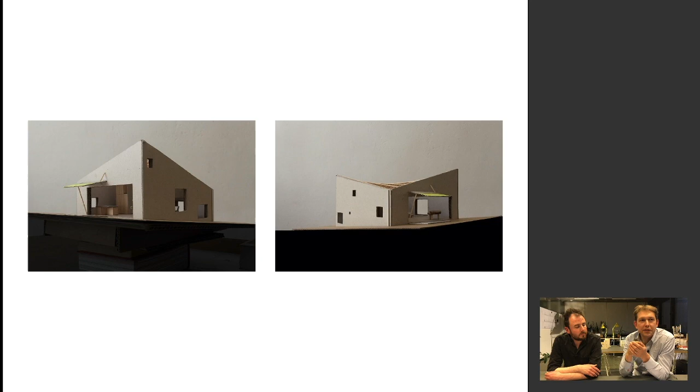With this roof, it was kind of an important moment in the design process when we transformed the flat roof into a hyperbolic paraboloid, which gives like 2 high points and 2 low points in the house. We placed the house as deep as possible on the terrain, as deep as legally possible let's say.

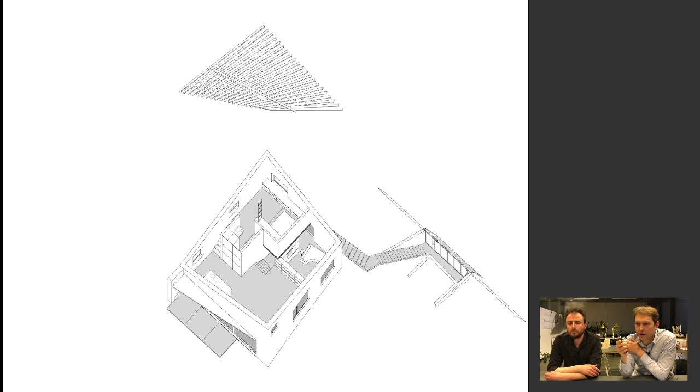So that it would be surrounded by the garden, and so that it touches the high level of the hill for the living spaces. And so you have these 2 high points: the high point with a double-high living room, and on the other side where we worked the house into the hill to have a duplex. And so the house is organized as kind of a spiral going through the living spaces, ending on the roof, like you see this staircase in the bathroom going through the roof skylight where you have then a terrace.

The last project was in a way also a way to find common ground between what was legally possible and what we wanted to do. So we had to do a pitched roof, which we then somehow transformed — this usually makes very introverted volumes, but we turned it inside out, and that was somehow accepted by the commune there.

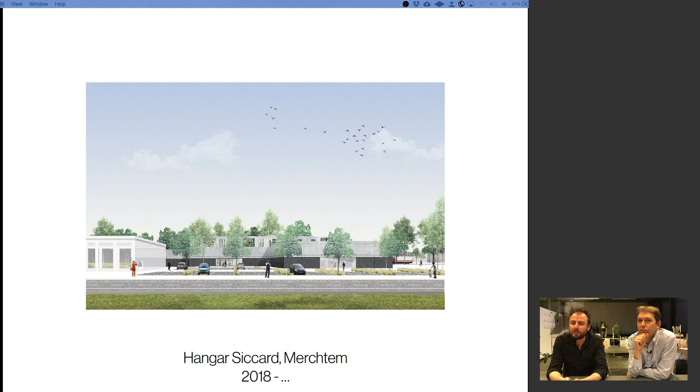This project, Hangar Siccard, is another one which is a bit atypical for our portfolio, because it's a new project and not at all in the old fabric of the city. In fact, it's at the Flemish Chaussee, the Steenweg, near Merchtem, and it somehow occupies the last lot there in the center, completely surrounded by industrial boxes and some leftover villas. So a very awkward but somehow typical context.

Here we're looking at the site and we see this kind of giant pacifier in the baby clothes store and a villa across from it, and there are other showrooms. This is in a way still agricultural land. And the client wanted to build, in fact, an industrial hangar, Hangar Siccard.

But he was somehow intrigued by the other possibilities this terrain offered. And it was bizarre, but there's a line running diagonally, parallel with the road, through the terrain, which divides it from an industrial zone in the back, which has other rules than the housing zone with commercial functions in the front.

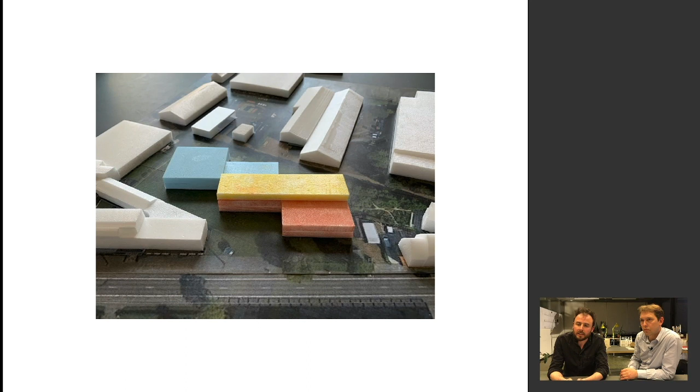Without wanting to maximize the economic gain on the project, we tried to make something that balances all these elements into one composition. We came up with this, which is a series of three more or less identical boxes and a strip of housing on top. The blue ones are industry, the red ones commercial, and the yellow ones housing. By this geometry, there's somehow a kind of peacefulness introduced in this chaotic context, we hope.

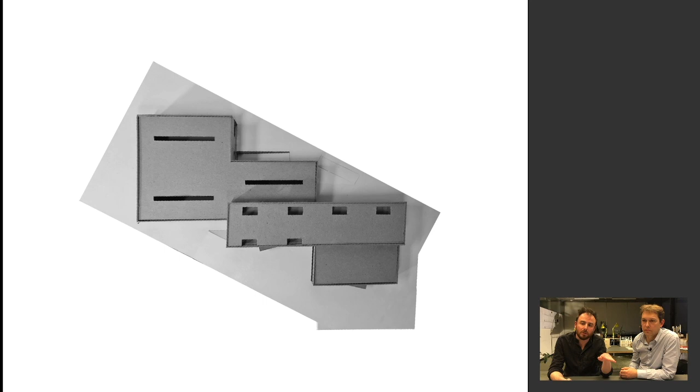It also creates pockets for each program. At the front, it's parking spaces. At the back, it's more loading bays for the industrial halls. And the pocket at the left is, in a way, a private entrance for the housing.

This evolved to this plan. You see that the boxes, we didn't manage to keep them really identical, but maybe that's not such an issue. They're really just empty spaces built with a very economical system.

It's just steel construction with concrete paneling above it. This system is continued into the layer of houses, where all these rooms are built under a big span of 12 meters. So in a way, all these walls can move around, and you make this kind of multifunctional lofts which are connected with the gallery. By their position, 7 meters above the ground, they look over this context of the chaussee and to the fields just beyond that.

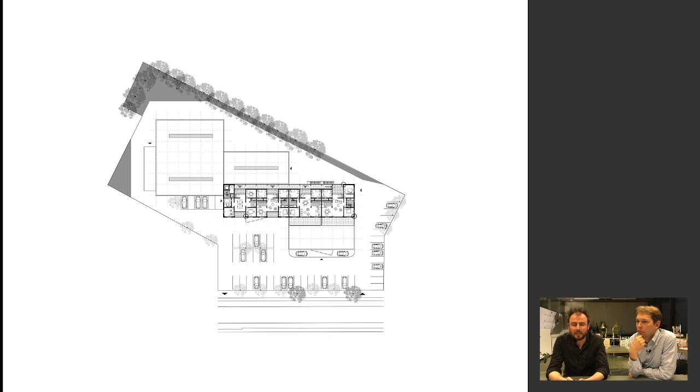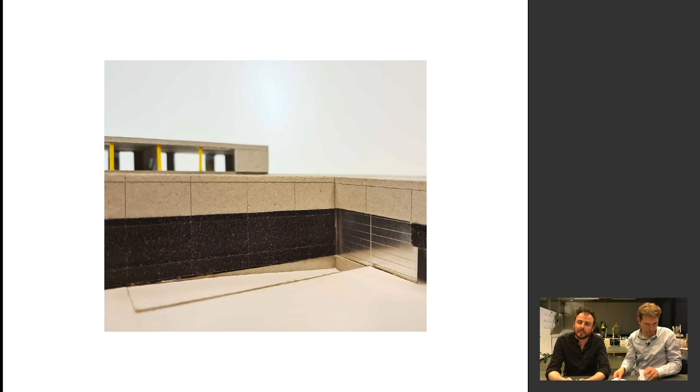Not far from there, we were asked to make a renovation of this historical pastorie, a rectory, just next to the church in a small village. This pastorie had been abandoned for a few years, and is surrounded by this enormous lush garden, which we were told it was completely unimaginable to do interventions there.

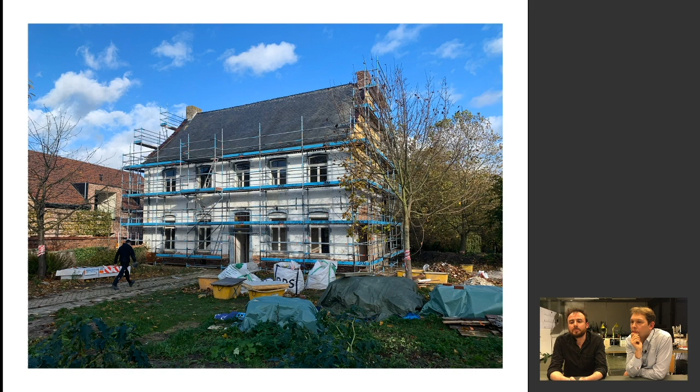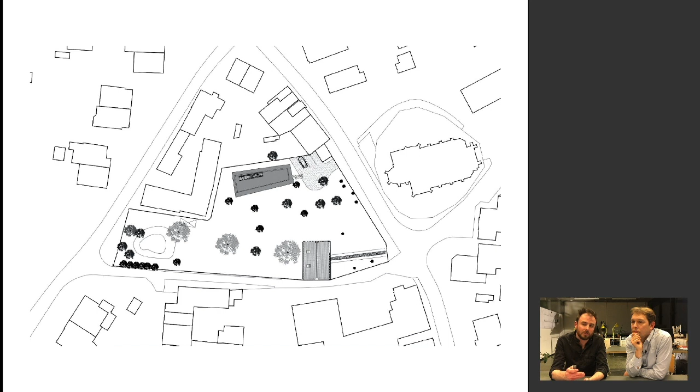We made an extension, which will be the offices of the family that lives there, and it's positioned as a kind of side pavilion with a separate entrance, as much as possible taking distance from the house.

The idea was to keep it very modest. At the same time, we had to realize a certain size for it to fill its function, and we came up with this idea that maybe the rooms could start small at the front and enlarge towards the back, and by taking a horizontal roof line, they would not only increase in size but also increase in height, so they become more and more spacious towards the end.

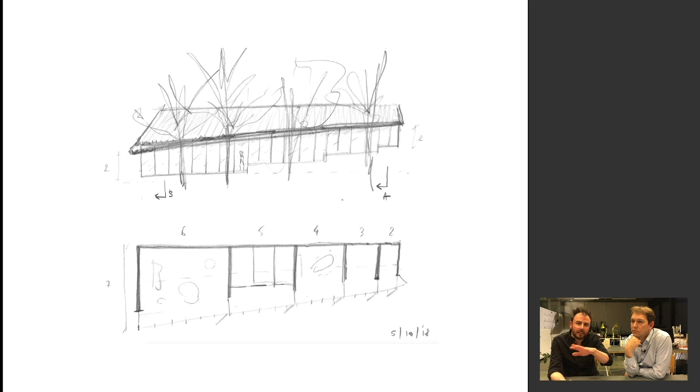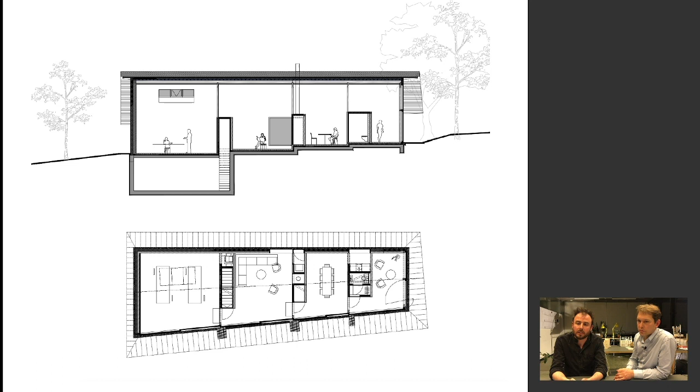This is an early sketch. You see this idea of a kind of logarithmic change of the rooms, and this evolved in the end to a bit of a simpler plan, where these rooms are separated not by walls but like boxes, which contain all the necessary functions like kitchen, a toilet, fireplace, stair to the basement, and start at the front as a kind of small entrance zone, and it evolves to the end to a quite large and spacious office.

This is the pavilion with the rectory next to it. And I forgot to mention, the clients had one requisite, and that was that the extension was to be made with a straw roof, a thatch roof, which we thought was a funny thing to ask, and at the same time kind of interesting. So we really made that into the face of the project.

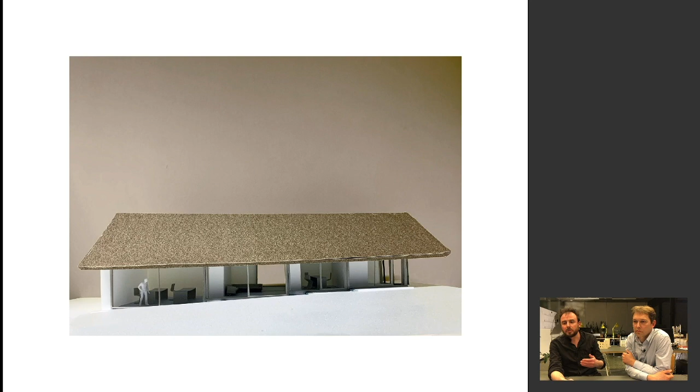So what you see from the garden, and this is a collage from it, is mostly this roof, and then under it, quite subtly, the facade of the office.

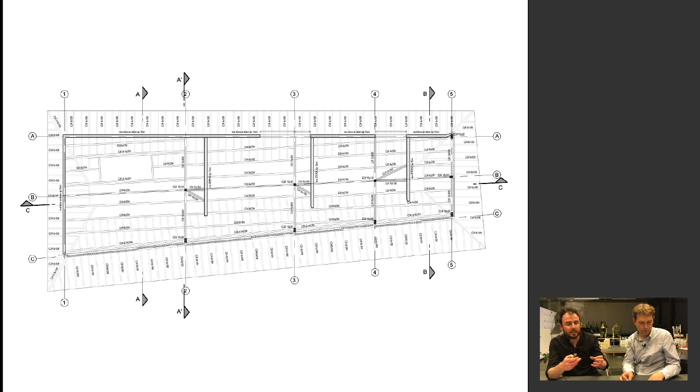The roof itself is a construction out of oak. At the same time, it doesn't have the typical huge oak dimensions. So we worked quite hard with our engineer, Bollinger-Grohmann, to create something that really reduced the dimensions of it to the limit, with columns rising 6 meters high in the center, but only 10 by 10 in dimension.

And then afterwards, the contractor, a specialized wood contractor from Liège, I think called Cine, took over and made very detailed drawings of every element of the pavilion.

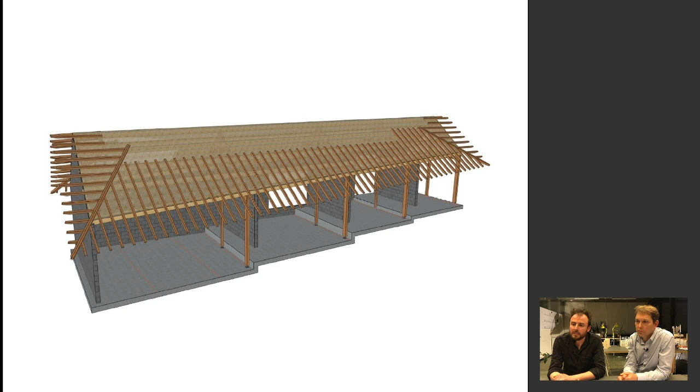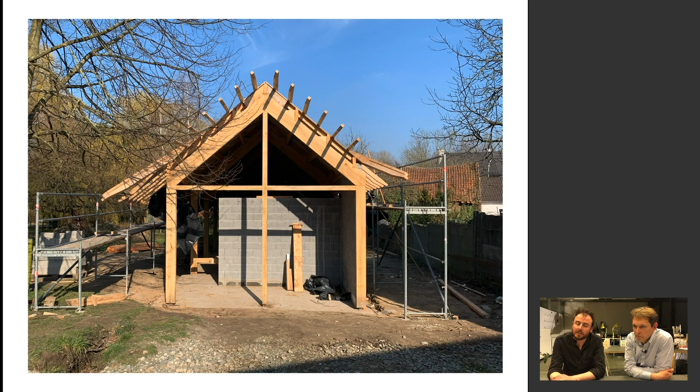At the moment, it's under construction. This was a few weeks ago, where we see these porticos with these slender columns supporting the center of the roof. And this was actually today, visiting the site where they're finishing the cantilever of the roof, and here you get already an idea of the space that it becomes.

I jumped to another project, an important project for us, the Gare Maritime, which we see as a new common space in Brussels, a new kind of public space, let's say.

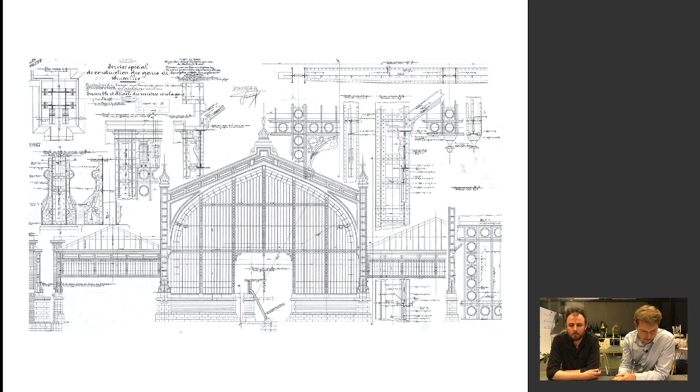Funny enough, we also found hundreds of plans documenting everything that went wrong with the building. There were a hundred building campaigns by the NMBS, transforming the building into a kind of technical shed. We found all these plans where they talk about removing the ornaments, or replacing the glass with undulated plates, or moving gates, closing off halls, etc.

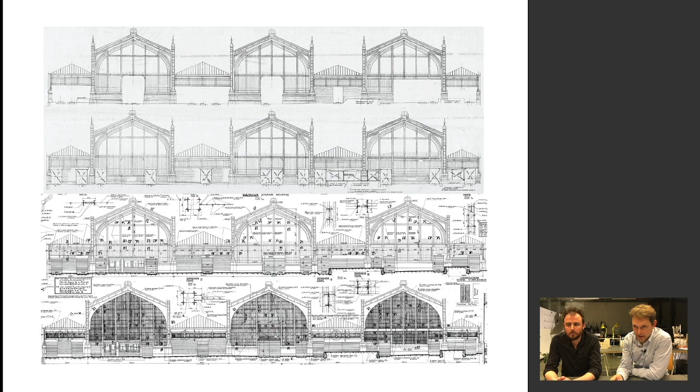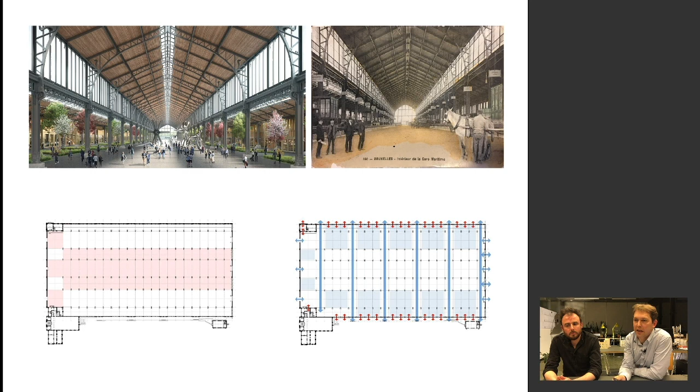Inside the hall, we decided, together with Neutelings Riedijk, to make the inside architecture, and we worked together with Bureau Bouwtechniek for the skin of the Gare Maritime. Inside, we decided to keep the central halls free of buildings, so that they would become the identity of the Gare Maritime - you see the original dimensions of the building, you have a lot of original elements.

And then we created a kind of grid organizing the Gare Maritime as a kind of city, a covered city, with streets and squares and access.

And we tried to open up the Gare Maritime, which used to be kind of a treasury box, very secured, completely closed, into an open part of the city in which the urban tissue around would continue.

Here in this slide you see these concepts translated into technical plans. We had to go look for the original stones - we found some on different places on site, or recuperated stones in the demolition - to make the openings, etc. This way we could recreate this original symmetry and materiality.

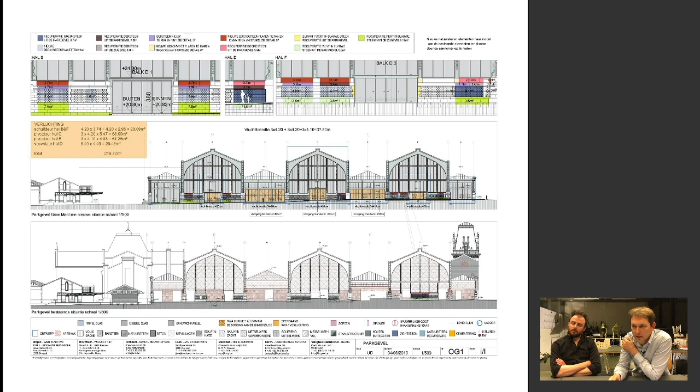The same goes for the side facades, where we had to find a way - you see, they also encountered all kinds of interventions. They even built a hall next to it and broke these windows you used to have, and made large openings. We had to find a way to introduce all these new openings to make the Gare Maritime kind of porous and open.

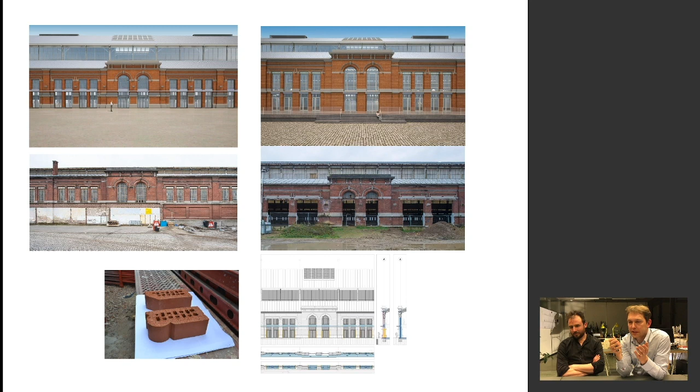And so we entered it into the original composition of the windows on the first floor. We made these new openings, but in this gigantic thick wall of 80 centimeters, it would have been quite hard - this is called percement. So we took back these original form stones, which they used to negotiate between in and out, to make it softer, the way the opening is inscribed into this thick wall of 80 centimeters.

I'll go maybe a bit faster.

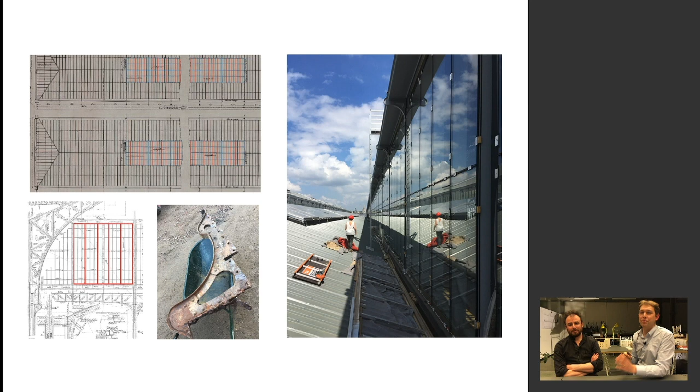For the high facades and roofs, we found in archives how it worked, how they were composed, what was the rhythm. We took 2 or 3 modules together to make a basic grid or module of 1.20 meters that would come back in facades, roof plans, and skylights, creating unity and restoring the verticality of the original steel structure.

This idea was also adapted in the inside volumes, modulated on the same 1.20 meter grid, which created a beautiful harmony between new volumes and the existing building. In these new volumes, the skin of the station became an important element of the experience of these working spaces.

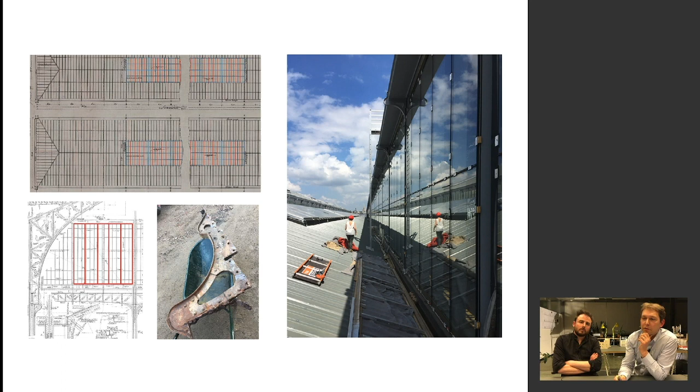I wanted to also talk about the ecological ambitions we had. You see this console carrying the old gutters. They were all very damaged, and we recreated them. We found this Art Nouveau ear shape very important, but we detached it thermically from the structure so that the insulation line would be continuous in the new design.

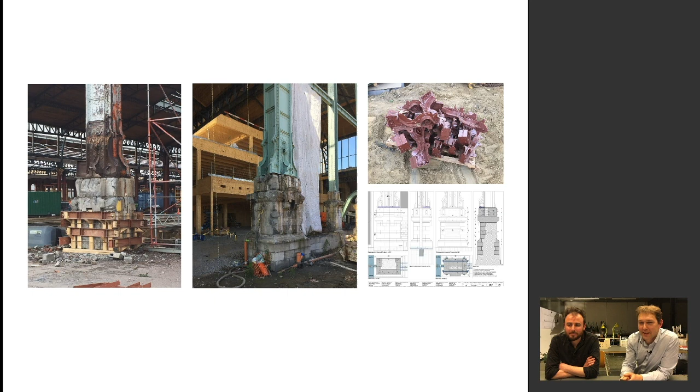I'll go a bit faster through some other details. The building was in quite bad shape. We had to renovate all the bases of the columns, recuperating elements. And then the work starts.

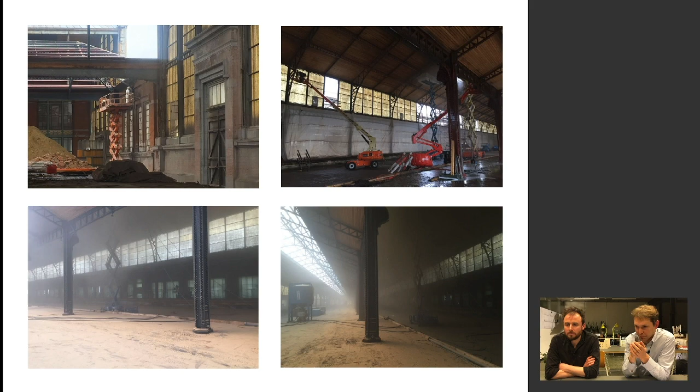It started quite dark. We first had all these works of sandblasting the lead paint to repaint the columns in a fireproof paint. But slowly the original quality of the hall started to reappear, like you see in that facade picture. The inside was as decorated as the outside, in fact.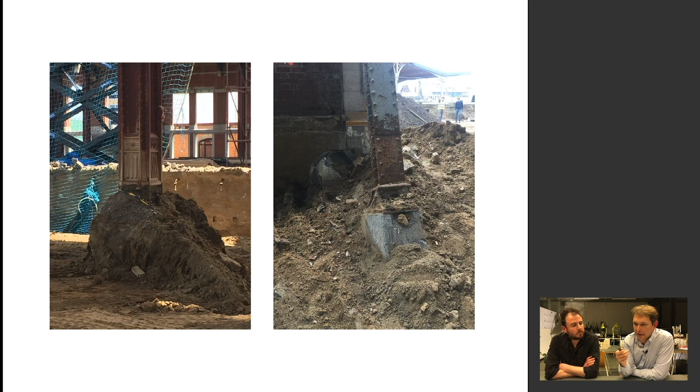A lot of information was still underground, so the project grew every week. In the head facade, we discovered in archive pictures that there were ornaments in another color, these white plates on the facade. We noticed some were still left, so we researched it, and it turned out to be terracotta panels that, since we had found some, we could reproduce. This is one of the few ornaments we remade, but it had a huge impact.

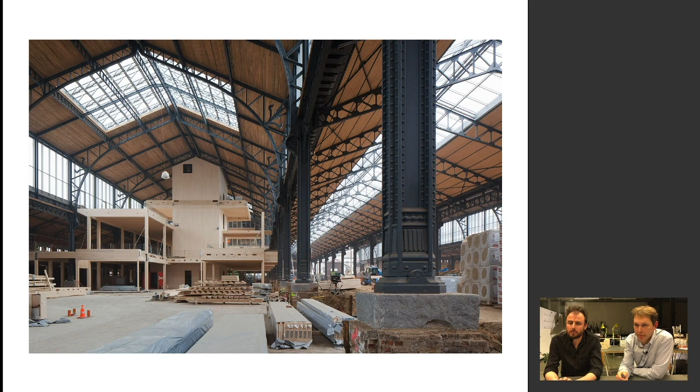Some other construction site pictures—it starts to get shape. The new buildings arriving, we chose wood for its ecological value, but also because it's so light it didn't interfere with the existing foundations of the station, and it's a material that is assembled at incredible speed, which was also quite important in this project.

It articulates very well—we like a lot this relation between the old steel structure and the wood, the CLT, that is used in the new constructions.

You see these big skylights in front of the building. We needed them for smoke evacuation, but also for light into the office plateaus and to avoid overheating. So you had all these openings in the roof corresponding to openings in the facades, which would create a little wind that makes a very nice climate inside.

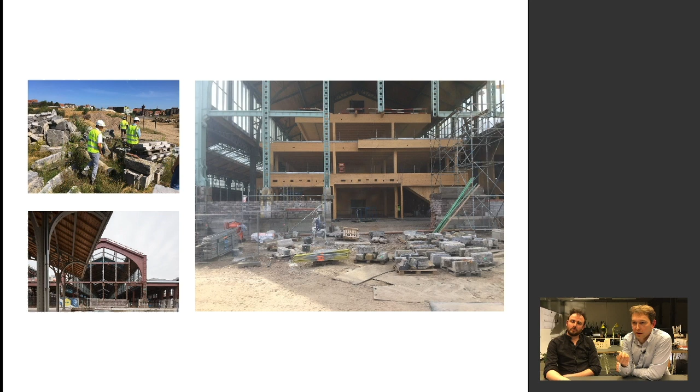I talked about all this natural stone we recuperated. We went looking on site and reused stones that were placed in other places to recreate this layout of the park facade.

Here we have the pignon facades, the side facades. And here you see us on almost the last site visit, as the green arrived.

Today it's open, and I recommend everybody to go. It's a fantastic place, and we really believe it's a special new kind of public space, a covered public space that will welcome everybody around.

We also like a lot this interaction of old and new, as I said already. We like that this new construction creates new relations with the heritage—like suddenly you see this steel structure, supposed to be 50 meters above you, from very close, and you get this feeling with the arts and crafts of the time.

That was the last slide of the Gare Maritime.

I jumped to a project over the canal, the Kanal—a project we did as heritage expert with Christ & Gantenbein and Office, Kersten Geers and David van Severen. We advised the team about the history of this building and its valuable elements.

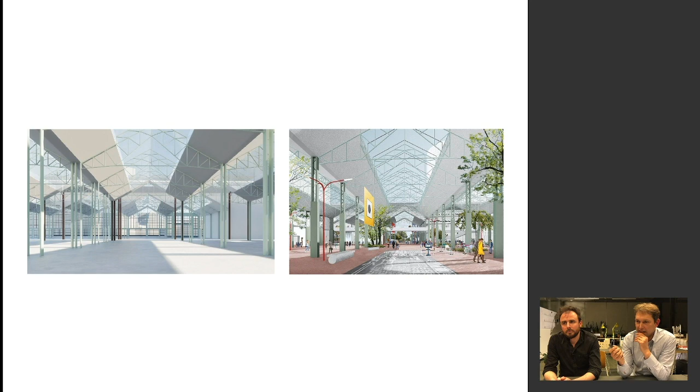It was really an interesting interchange, where you see that the concepts we came up with to make this structure fireproof, for example, then became a feature in the design.

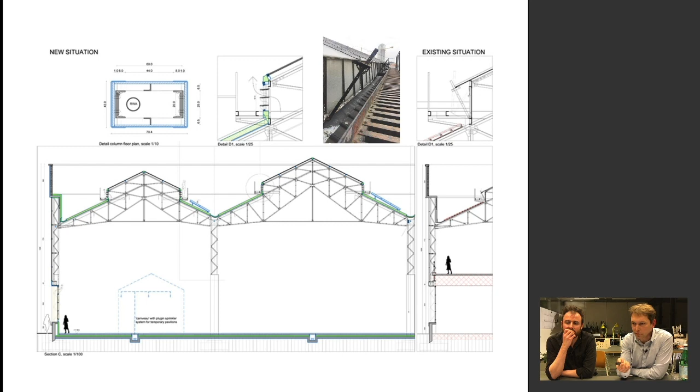Or systems that we discovered, like the original ventilation system, inspired us to make new systems in the same positions. So we like a lot this technical side of how to isolate valuable structures.

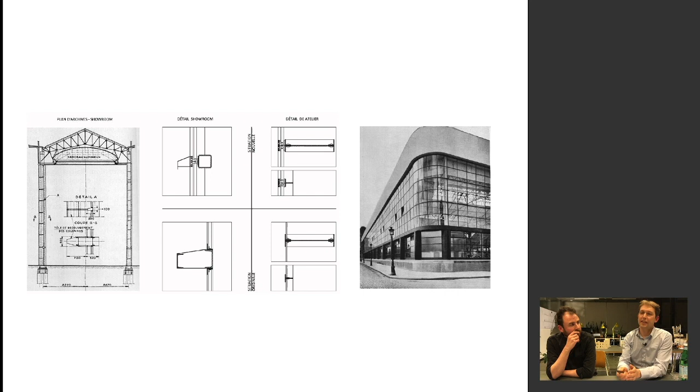We saw in this original picture that the original glass facade was kind of the image of modernity they wanted, with what they wanted to sell cars. In fact, it was a very important feature. We proposed, and thought it was a really great idea, to use the original T profiles as the structure of a new curtain wall with double glazing. It would have, on the one hand, this original smoothness and softness, and on the other hand raise the comfort a lot. We liked this idea a lot.

Another theme that might seem not so important is the color scheme, which we found quite important. We saw all these traces about the original color scheme that was a bit strange. Apparently, we found out that the building used to be painted in the colors of the brand Citroën, and when the brand was taken over, they repainted the building in the new colors of the new brand.

By just knowing how it was, we came up with what we thought it should be in the future. We proposed that this white, which became a quality and a known image of the Citroën building, was kept, but we went back to this brown chocolate curtain wall, and we chose petroleum blue for all the openings to make visible the new function as a modern art museum.

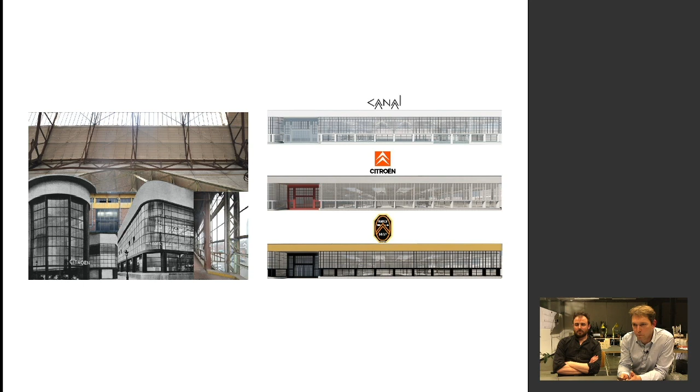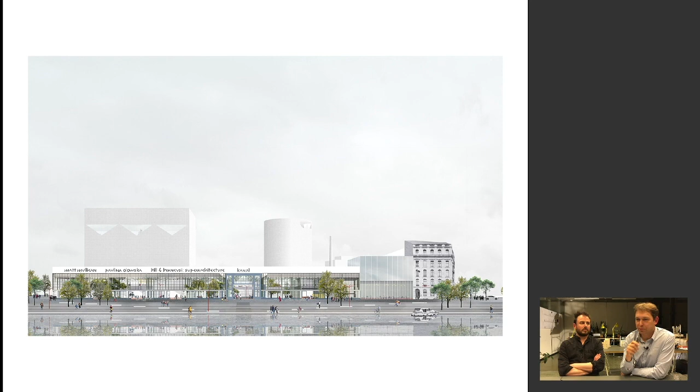Unfortunately, we lost that competition, but we won this one, the Floraliehal in Ghent. It's also a steel structure, a big hall, an event hall, built for the World Fair in 1913. It's part of a larger complex with the Kuipke, the S.M.A.K., ICC, and the casino surrounding this Floraliehal. I will just talk about the Floraliehal.

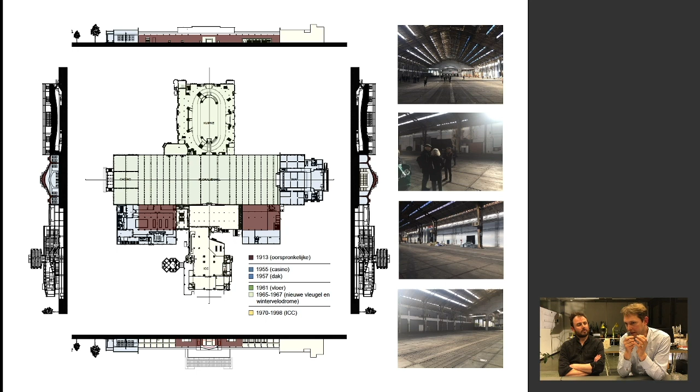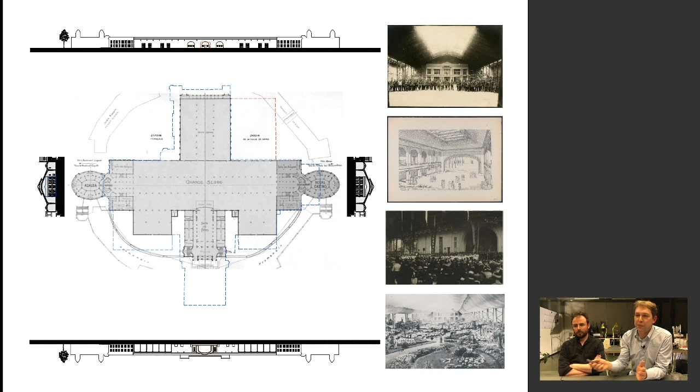It's again a space where you don't understand what the architects were thinking. It's completely closed, so we dug again in the archives, discovering all these original intentions and beautiful design elements, like this ballroom that used to exist next door, which had this big stage opening towards the Floraliehal, the central skylight. We think that just by telling this story to the team, we start popping up these features of this quality that existed in previous phases, and they start to get their own life into the new design.

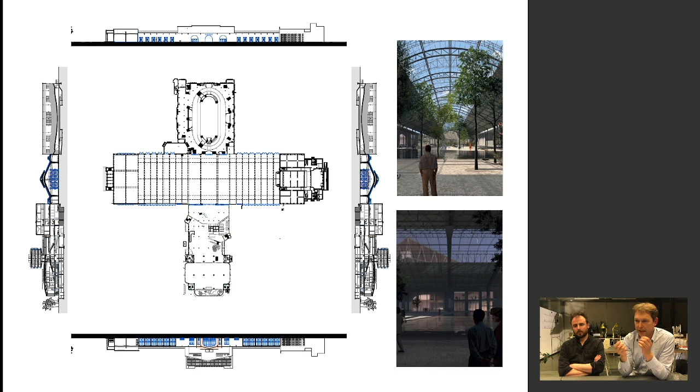And with this, we kind of jump back to the site of the Gare Maritime. I think all the projects that Jan talked about were somehow about finding a new connection between the past and the present, making revive the qualities of a structure in the present time, and are in a way very modest. This is also an example of a super modest project, but also on a very modest scale, where it is much about just connecting two contexts with each other, and the architecture being a very thin line between them.

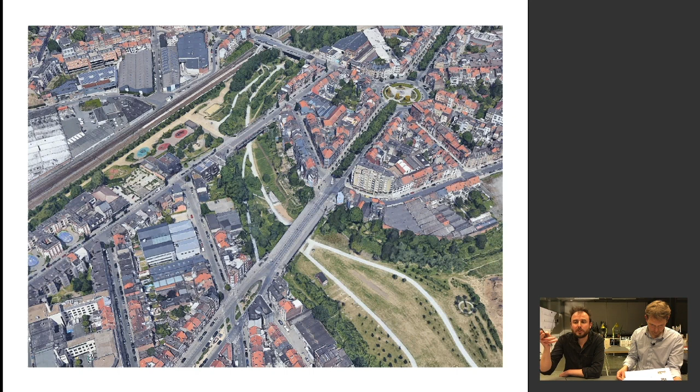This is a picture of the current situation. On the south is the Tour et Taxis Park, designed by Bureau Bas Smets, and towards the north it becomes this kind of canyon, which is a series of small pocket parks, you could say, divided by bridges. We worked together with Landinzicht, who also designed the park two bridges further.

This little project — the assignment said literally you have to replace this connection between the bridge and the park, which is now in the form of a kind of scaffolding structure, very rickety and loud, and actually intended to be temporary, but it's already been in place for 5 years.

It's quite an interesting place there, because you have the presence of Parckfarm, which has become a little community center, and also a place where there are workshops where you can get a drink. So kind of a little gathering place in Parc Tour et Taxis.

What we discovered is actually that we can solve this question not by designing a new connection, but rather by making the connection unnecessary, just pulling the landscape through with a slight alteration to the level of the bridge.

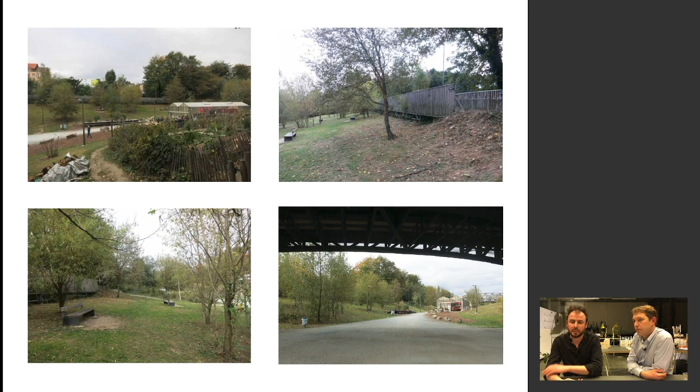That means that a lot of the budget that was actually intended to make a bridge somehow becomes free, and you can use it for other stuff.

We borrowed a bit from the language of the parks around it, and we designed this small master plan, you could say, where each corner of a bridge is always connected to the park, either with a ramp or with a stair. And the stair is actually the only thing that we in the end still design.

With Landinzicht, we designed this series of paths, but in a way it will feel very natural and unpresent if we do it well. We also have this series of lateral connections in the form of steps, which is also a language that comes back in the next part.

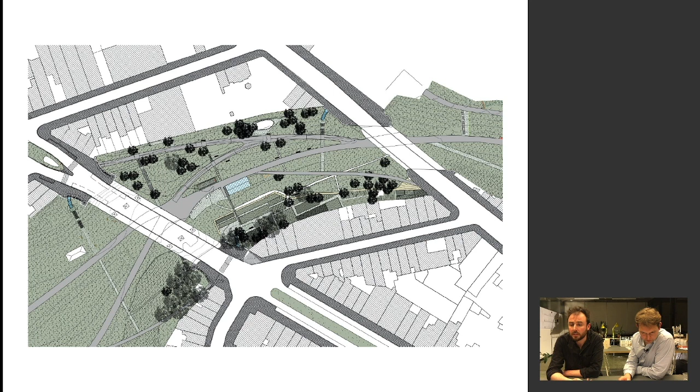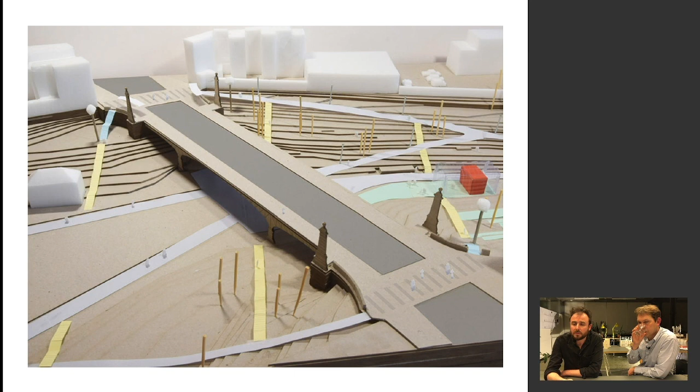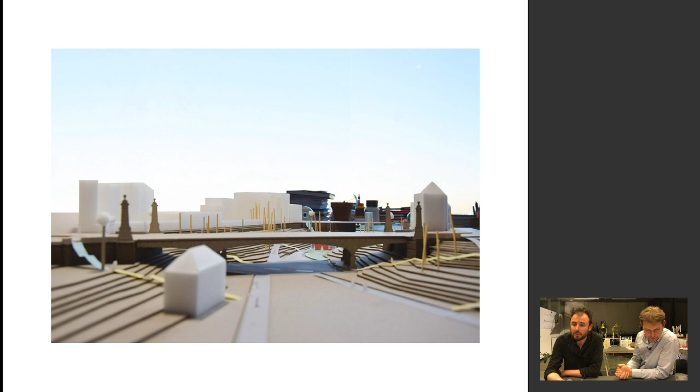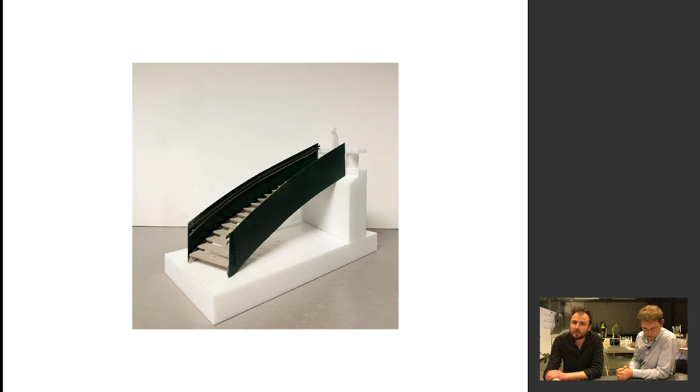Here is the actual intervention, the architectural intervention, a simple stair in a folded steel plate with concrete steps. And this is an image of the project, what it will look like looking from this stair over this newly connected place.

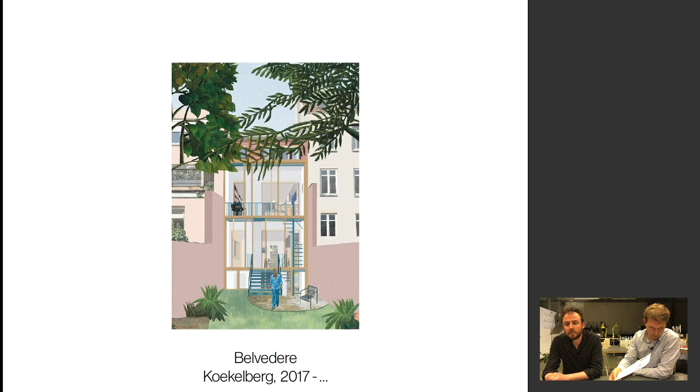In the next project, the intention is in a way similar, just to kind of connect 2 different worlds, but it's on the level of a single family house in Koekelberg, where this is a picture of the site. It's somehow in the center of this block of row houses in a quite nice street close to the Basilique of Koekelberg, where a lot of these houses have very deep and very lush gardens.

This is our house, kind of 40s, quite beautiful, modern, maison de maître, you could say. But the back facade seems to be designed in a way completely unaware of the qualities of connecting to the garden.

Our project actually consists of just adding a very thin extension to the back facade. Actually, it's about 1.80 meters wide, just enough to put in a small circular stair. And it functions as a connection between all these stories, and also as a kind of winter garden extension of the spaces.

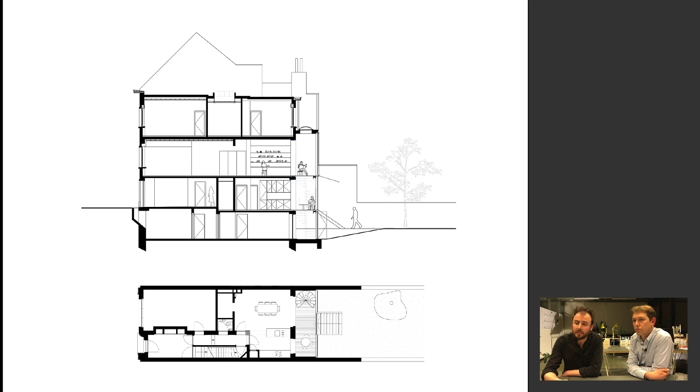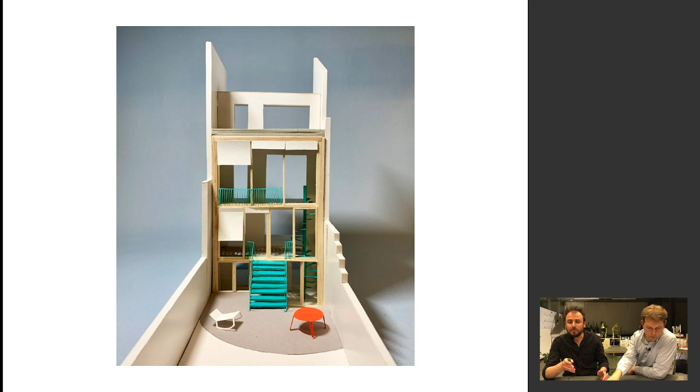A view of the model where we try to make a composition where again a bit like the Pastorie pavilion, there is a play of geometries which starts really small and increases towards the top to these enormous sliding windows.

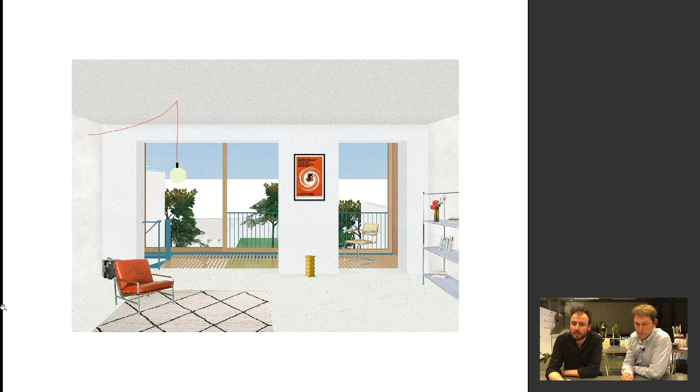A view from inside, where you see that we have the intention to make these floors almost not there, like as a kind of lattice work, to make this connection between the stories where they will superimpose the kitchen, the living room, the offices, and the bedroom, all as a kind of vertical sequence of living to connect them as much as possible. And here a view, laterally in the extension between old house and garden.

From a house in Koekelberg, we go to a castle in the castle of Bouchout in the botanical garden of Meise, a castle, former castle of Charlotte, the sister of Leopold II, and before that like a medieval stronghold and a hunting castle, but that before us became already public, common, and is now part of the visit or the public circuit in the botanical garden.

We do this project with Nu Architectuuratelier and Archipelago, and our assignment is on one hand to build the restaurant of the botanical garden in the Pachthof, the old farm of the castle next to the castle, and then a conference center and public routing through the castle.

Here you see the present situation of the castle, intriguing when you first come there. Inside, sometimes a lot of the interior seems to have lost its relation to the historic castle.

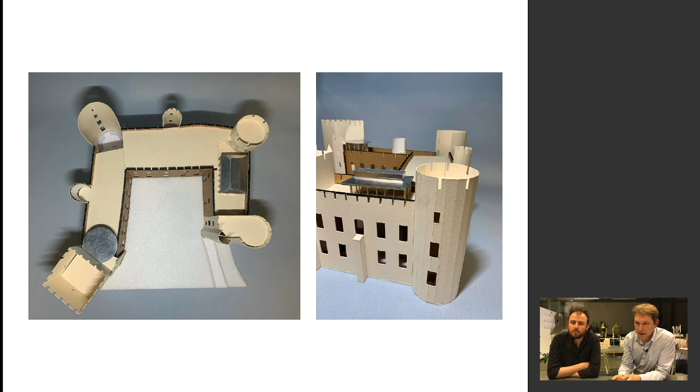A model picture, and then this last picture. In fact, we hope to put back the roof, one of the main roofs. But that's our long-term vision, which we already proposed in the competition. We hoped maybe some funds would be found, but it's still possible. We proposed to move the big hall on the first floor to the roof, so that it would benefit from the fantastic outside spaces, and that the original circulation inside the castle on the first floor could be restored, with salons watching the park and a gallery watching the courtyard.

It was located on this central plot, in a very hectic place in Anderlecht, squeezed between the canal and the Chaussée de Mons, with the railroad crossing, trams, and a bus station all around this awkward roundabout. So a very busy place.

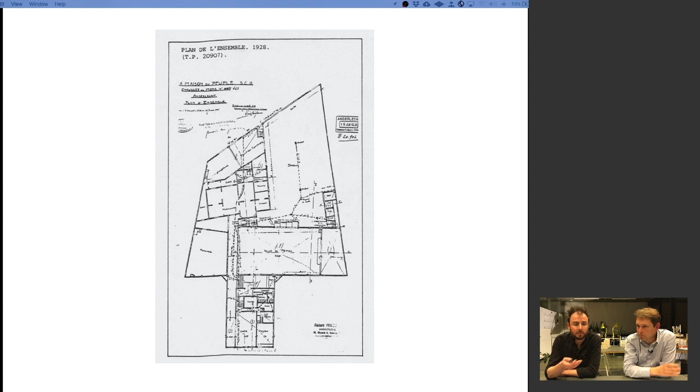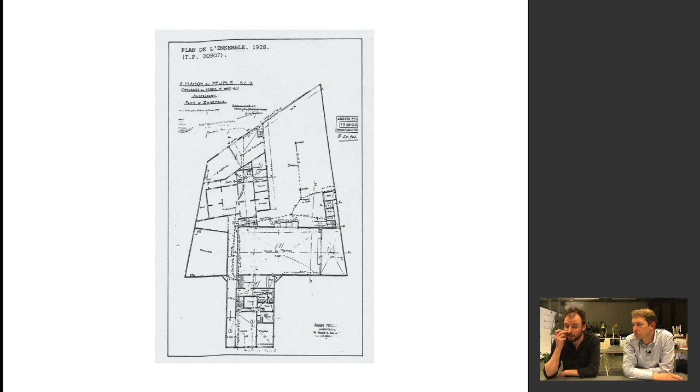And it's this vibe exactly that the client wanted to revive. So they want to create a Maison du Peuple which is not only a place with a cafe and some meeting rooms, but also with this salle de fête, with housing, and with a place for industry - ateliers, a brasserie they were thinking, inspired by the machines of Nantes. Maybe some large machines could be created there and so forth. So quite an ambitious vision for a rather small budget. We worked on this competition with our friends at West, who specialize in doing a lot with not much. That was very stimulating.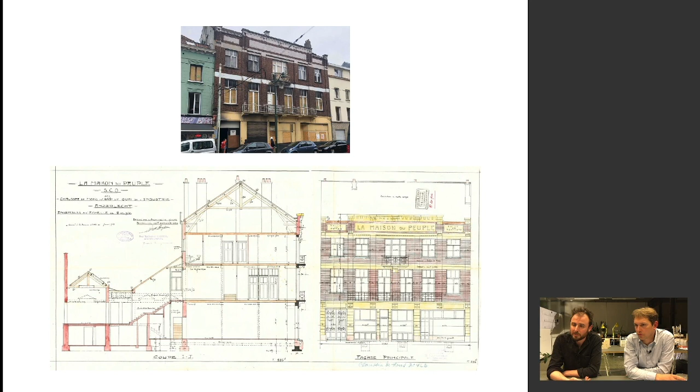Initially, we see this hall in the center of the picture. A very tempting idea would be to put all of the new program on the sides of the plot and create a nice interior garden dividing it all. But we had the feeling that in this place this would not help the context, and we wanted to create some space in this very hectic urban situation by making a kind of parvis on the side of the Maison du Peuple.

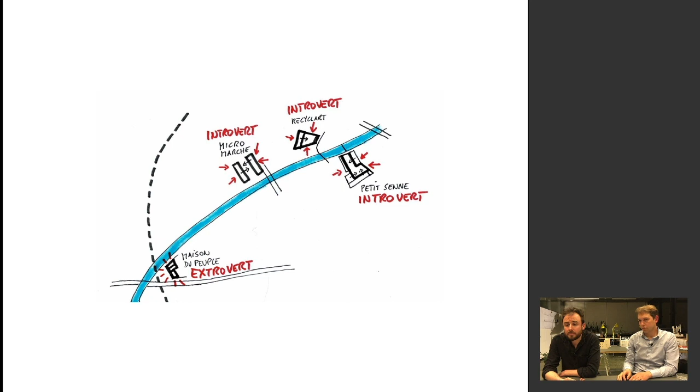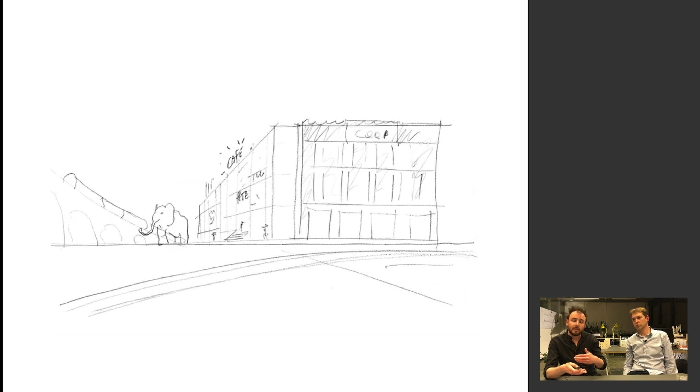Here you see the drawing with the elephant, which we borrowed from the Machines de Nantes, and a new connecting building which would be parallel to the railroad, creating a kind of billboard structure that is the entrance to the Maison du Peuple, but at the same time the facade of it - maybe a vitrine, and maybe even a screen for what happens behind it.

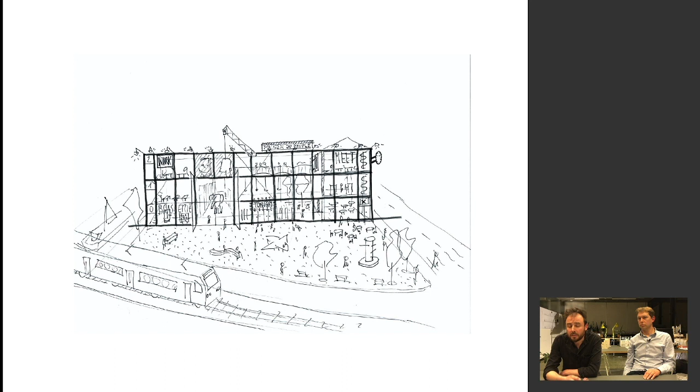It evolved a bit. We talked a lot, and in the end we toned it down to a more down-to-earth intervention, more to the scale of the user - a kind of table building which connects the three main elements of the project. On the right is the Maison du Peuple, a place with a bar, offices, communal meeting rooms, and artists in residence. In the center you have the salle de fête, and on the left there is a mixed building with housing on top of ateliers.

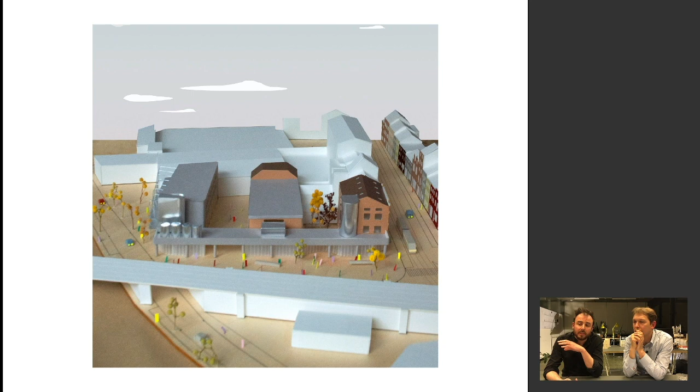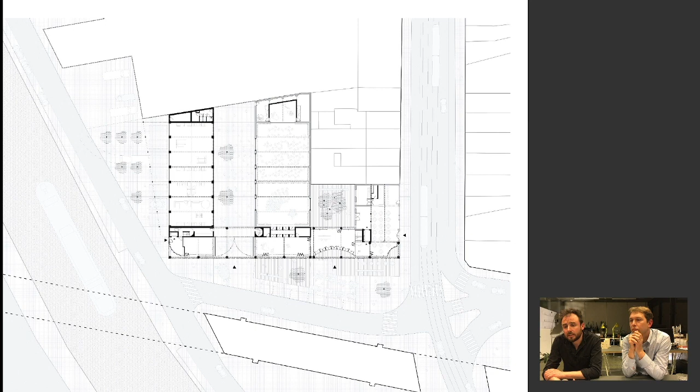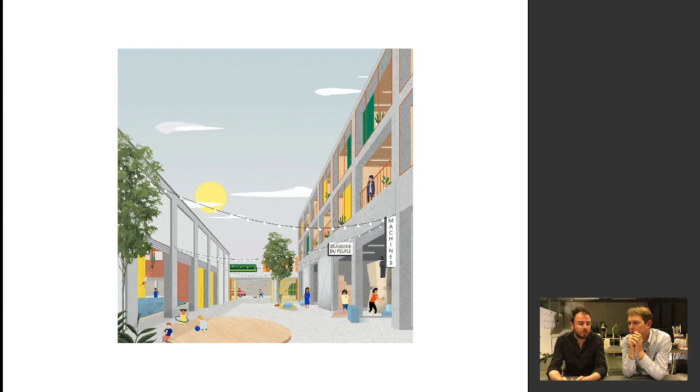This table structure connects all of these elements, and at the same time enables them by organizing the circulation and the techniques, creating a kind of antichambre to the spaces behind it. The ateliers, which you see on the left, take over the structure of the salle de fête at a smaller scale, and create in between them a kind of logistical garden, which can be used to hang out, but also to drive trucks in.

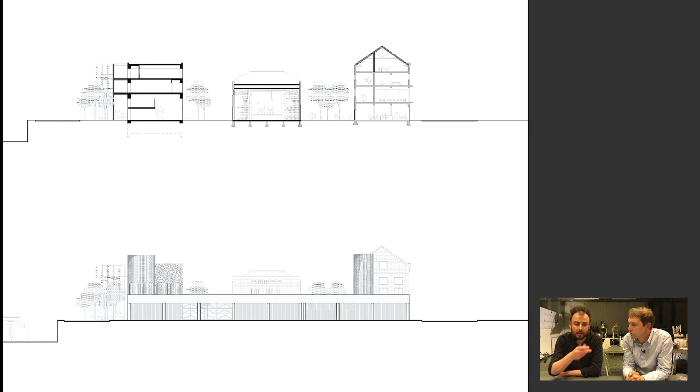Here you see the different elements of the project next to each other, and below it, the table structure, which is also used to put a few silos on, connected to this brasserie, to put the elevator of the Maison du Peuple, and to put the machines that ventilate the salle de fête. So a kind of practical roofscape.

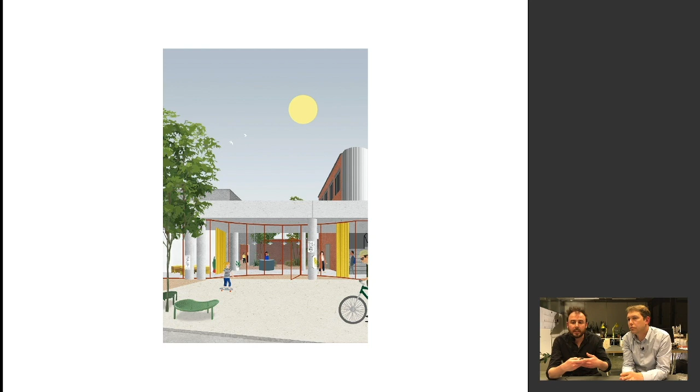This is a view on the entrance between the Maison du Peuple and the salle de fête. This becomes a kind of open lobby which gives out to this parvis. And this is a view from the model that our friends at West beautifully created.

You see this kind of cake-shaped public space in front of it, which we can imagine the activities of the Maison du Peuple spilling out into.

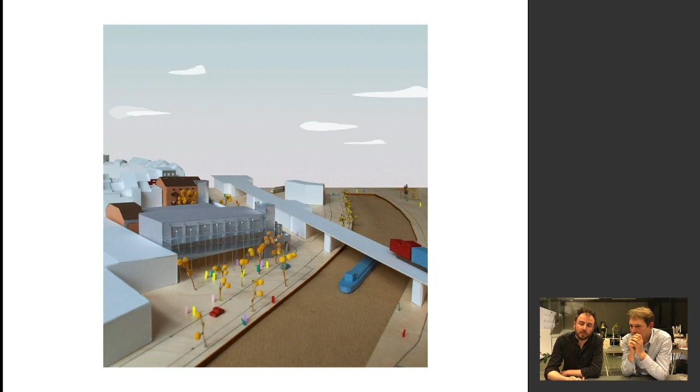This is a view from the canal side, where there is also a public space, but a more down-to-earth one, which is more used for loading and unloading in relation to the canal and the street in front of it, and has housing on top overlooking this scene.

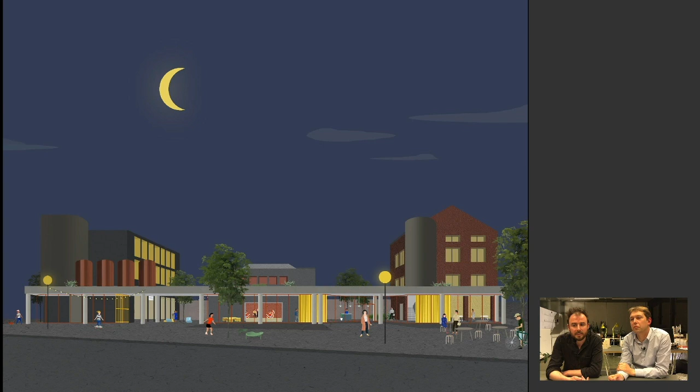A view of the Maison du Peuple looking from the round point with the cafe on the corner, and then this frontal image at night, as the last slide of our show.

So yeah, we don't know the results yet. We're still hoping. We saw that maybe we will know tonight, but we didn't dare to look. So that's it, thank you. Maybe there's some time for questions now.

Have you both studied heritage as well as architecture? Actually, not. And me neither, in fact.

I worked for Stéphane Beel in Ghent as a start, and every time we did competitions where there was heritage involved, we worked together with Origin. Through the projects I noticed I felt really good designing in this context, so at a certain point I jumped to the office of Origin, where I learned a lot about dealing with heritage. I didn't study heritage, and I don't really have a special skill for it, but I see this project we do together, where heritage is an important factor, and I don't see it any different from a project without heritage. It's more about a kind of sensitivity to feel the context, which in that case is existing, and to make a project that's clear and to the point.